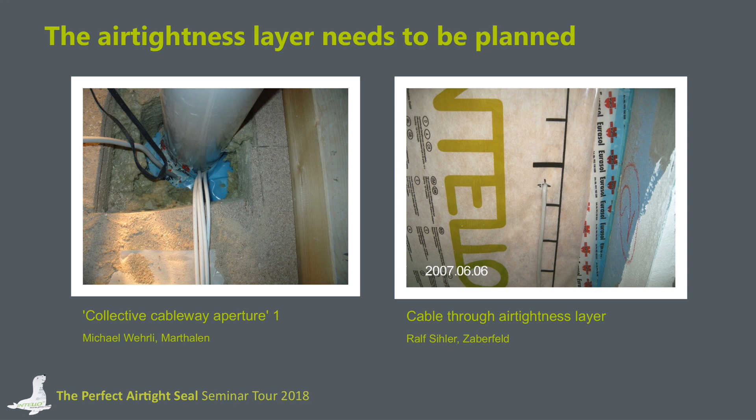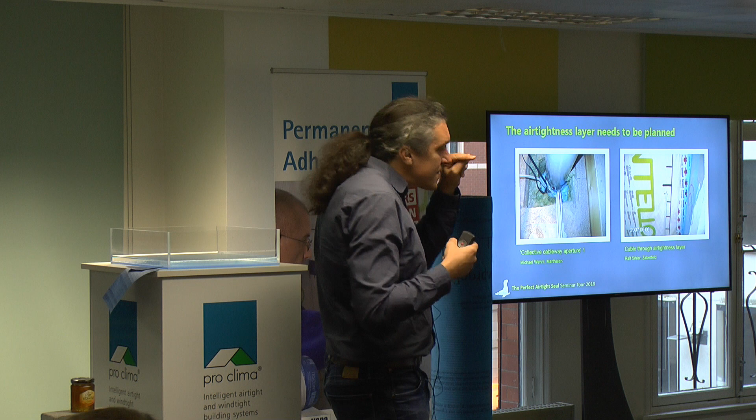I don't think that there will be a good solution for solving the problem on the left side, or at the right side. Obviously, the electrician knew a little bit about airtightness. And he said, okay, I just make a little hole into the membrane and then I push the cable through, but he has no tapes, no grommets available to seal it.

So if the installer of the airtightness layer will never come back, this will stay in this situation. The cable will penetrate the Intello membrane for the next decades. But this is not a sufficient solution for achieving airtightness. Or here, in the bathroom.

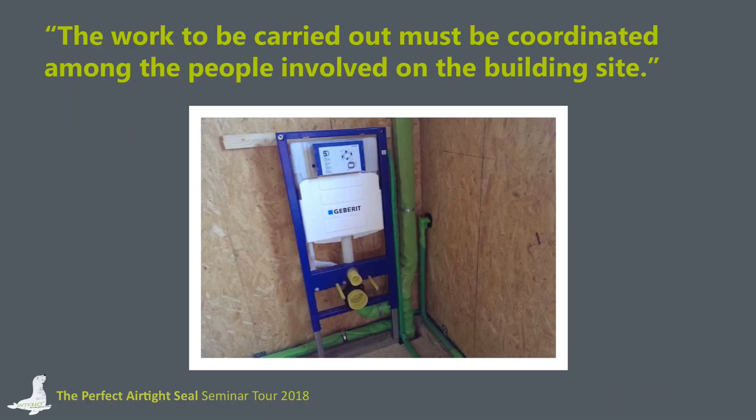So for the toilet, we can identify 2 penetrations of tubes that were not sealed properly to the OSB board. And in this situation, it could be possible that they will never be sealed, because in the next step, somebody is installing the gypsum board in front of everything. And then after the building is finished and the people are sitting on the loo, they are complaining about cold air affecting their kidneys.

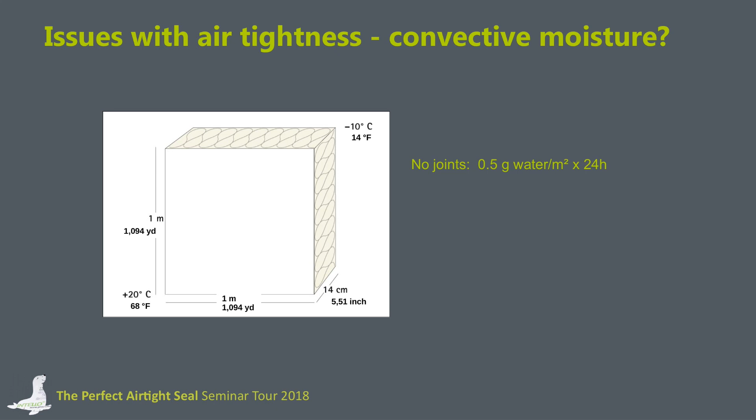This is happening a lot of times, and I guess that you have found it a lot of times when you're performing blower door tests. And you know where it comes from: unsealed pipe penetrations through airtightness layers. So this is why the people have to talk to each other. I already explained it, there's no second mark to be won in this situation, I'm sorry.

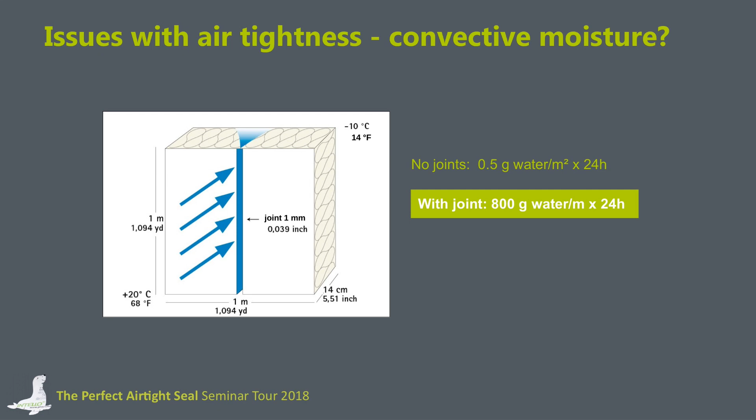800 grams per meter. Just remember how much moisture could get through leakages in airtightness membranes. There's another source for moisture, the storage of the material. I already explained it. Remember the roof hidden under the snow layer? This could happen to insulation material as well. You are not supposed to use insulation material that was getting wet due to the weather conditions and install it between the rafters, because then you get in trouble.

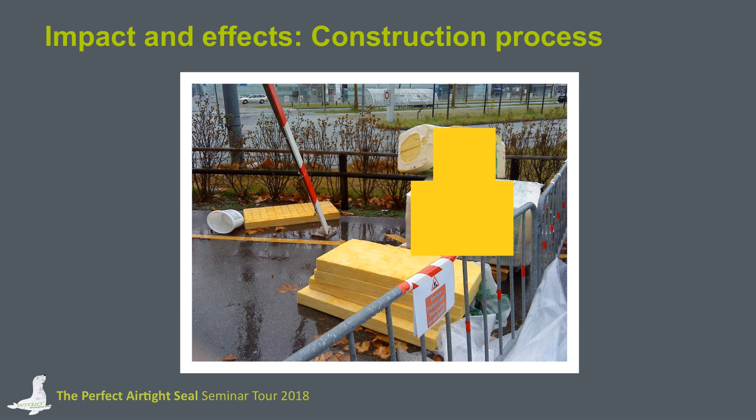Even if you install a humidity variable vapor check at the inside and have a diffusion open roof underlay at the outside, this needs to be dry before it could be installed. Or this situation, it's the same as with the timber. Some people think that the PE foil that is used to wrap the wood fiber insulation on pallets is enough weather protection and the material does not have to be covered.

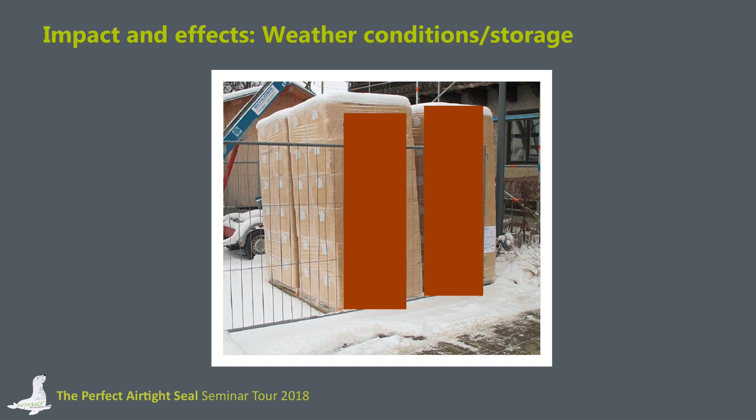But it's wrong. The PE foil used for this application is only to store the different packages on a pallet. It's not supposed to serve as a weather protection layer. So if you want to store insulation material outside, you have to cover it. Otherwise you could get in trouble, because the foil is not UV stabilized and it could get small holes and then the insulation material gets wet.

What are you doing in this situation as the installer of the insulation and the airtightness layer, or as the architect who is guiding the building site? You ought to be doing nothing. Nothing, of course. You wait until the plasterer comes and hides the moisture.

Of course. In Germany, the Association of the Carpenters published a brochure for carpenters producing furniture, and in this brochure it is mentioned that between furniture and walls of new houses there should be a distance of at least 5 centimeters, because they've experienced the problem that the furniture was growing mold on the backside due to moisture in the walls. This kind of moisture, you can hide it with plaster, but it needs to dry out.

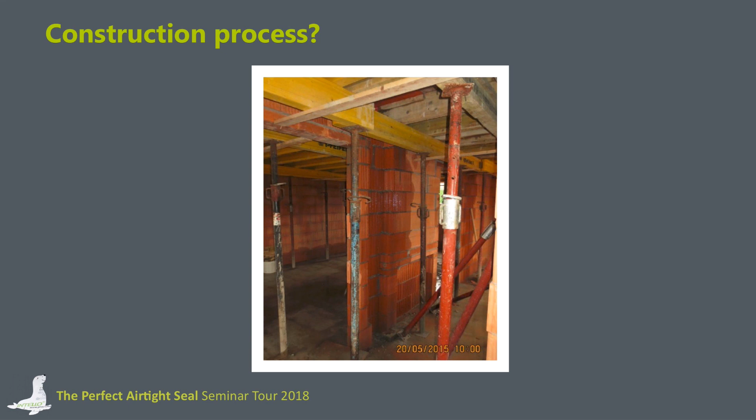So in this situation, you have to dry the walls. Probably you have to inform your customer and say, I'm sorry, if we are under pressure, we have to invest into mechanical drying facilities. We need to get rid of this moisture, otherwise we could get in trouble later on. And all this moisture is raising the relative humidity in your houses during the building time.

This is the moisture that we have to deal with during the construction time. Otherwise we could get in trouble and a problem could be caused within our constructions. And this is not a construction that has not been airtight. This is a construction where a lot of moisture was affecting the insulation material during the building time.

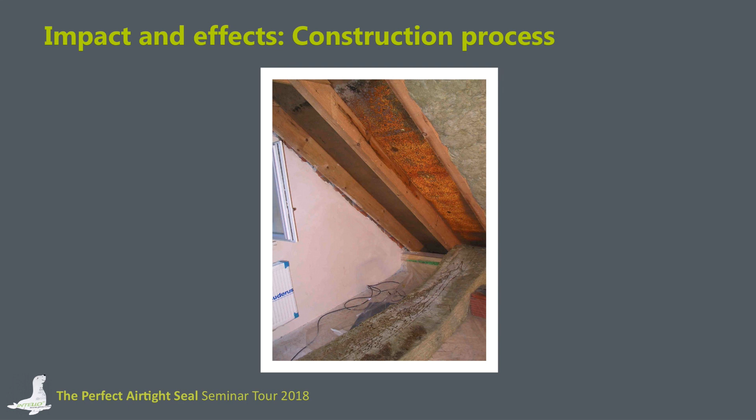And this was discovered by chance, not because moisture was running out of the construction. Somebody found it by chance because he wanted to install additional tubes that were forgotten in this building site. About 24% of building damages are caused by moisture. This is an examination that is published in a book, Learning from Building Damages in Timber Frame Constructing.

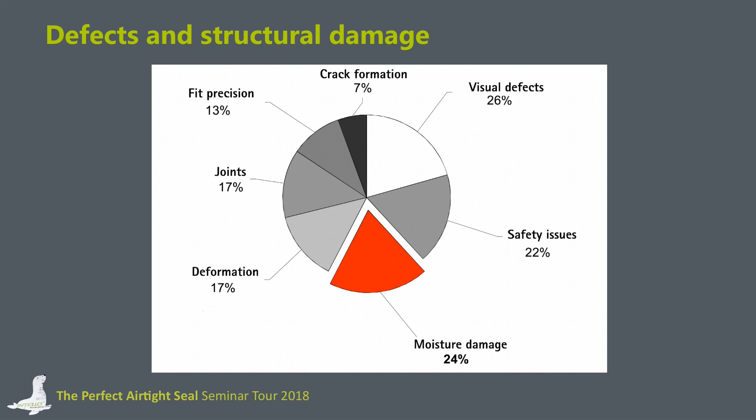It's a German book. And you can see visual defects, crack formation, joints, deformation, and most of the problems occur due to moisture in timber frame constructions. So that's where we have to spend the biggest effort to make sure that our constructions are not being affected. So we need dry building sites, we need low relative humidity levels, but the problem is that the timber frame construction of our masonry wall, of our brickwork house, is always the roof.

It's always there. And in brickwork, in houses made from bricks, you have always got a lot of moisture put in due to the screed, due to plastering. The material itself contains a lot of moisture. So if you install a humidity variable vapor check at the inside of your roof, then this vapor check has to resist the high moisture levels caused by building materials, the work that is undertaken at the building site, laying screed and so on. It has to offer a high diffusion resistance even if the relative humidity levels are rather high during the building time.

Because otherwise the material would let a lot of moisture into the construction and could cause problems there with growing mold, for instance. And this is where we have to take the Hydrosafe value into account, because we have got another German standard for wood preservation in Germany. And it says that a humidity variable vapor check needs to have an SD value of at least 1.5 meters at a relative humidity level of 70%. At least 1.5 meters, because if you've got a lower SD value, then the moisture that's occurring during the building time could get into the constructions very easily.

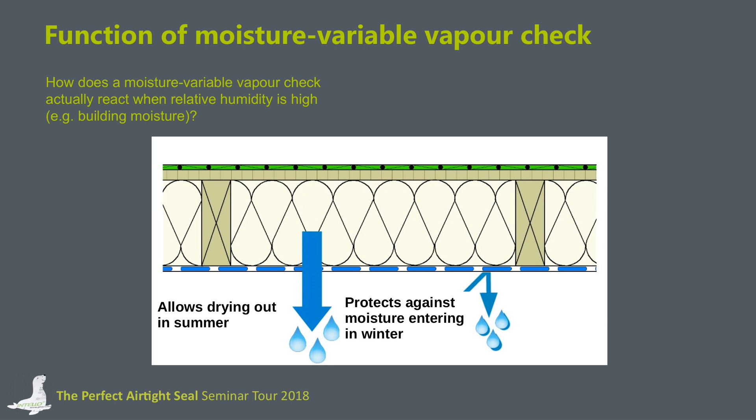And there are humidity variable vapor checks around, mostly made from PA, polyamide, that have got a very low diffusion resistance at 70%, less than 1 meter, less than half a meter. And they allow a lot of moisture to pass during the building time and to wet the insulation material as well as the construction. And this is a problem. So you have to be careful and check if humidity variable vapor checks fulfill the requirements of the Hydrosafe value. On the other hand, it shouldn't be higher than 2.5 meters. So it should be between 1.5 and 2.5 meters. Because if it's higher, you are getting less dry out capacity. Let's say at 70%, 100 meter SD value.

What SD values do you have to expect at 90% relative humidity? They wouldn't be low enough, because the lower the diffusion resistance is at very high relative humidity levels, the more moisture could dry out. That's why they limited the maximum SD value to 2.5 meters. So Hydrosafe means an SD value of the humidity variable vapor check between 1.5 and 2.5 meters at 70% relative humidity, and all the humidity variable vapor checks from Pro Clima fulfill these requirements. The DB Plus and the Intello Plus have got a fitting Hydrosafe value that secures that even during the building time, when the relative humidity levels are rather high, the constructions are safe.

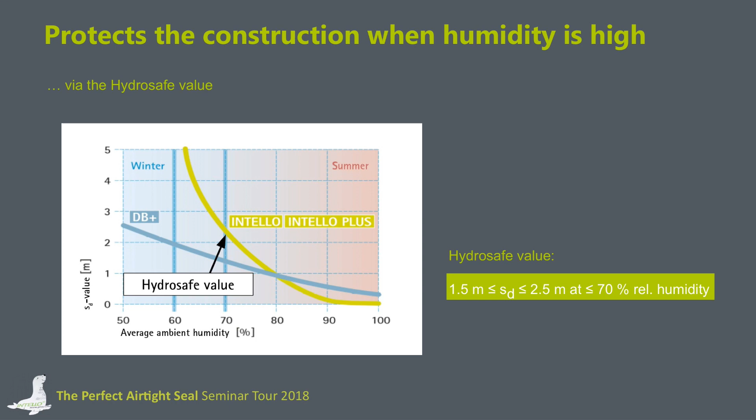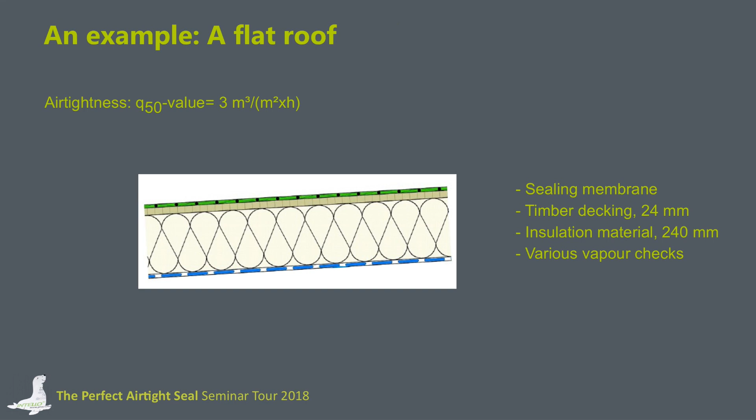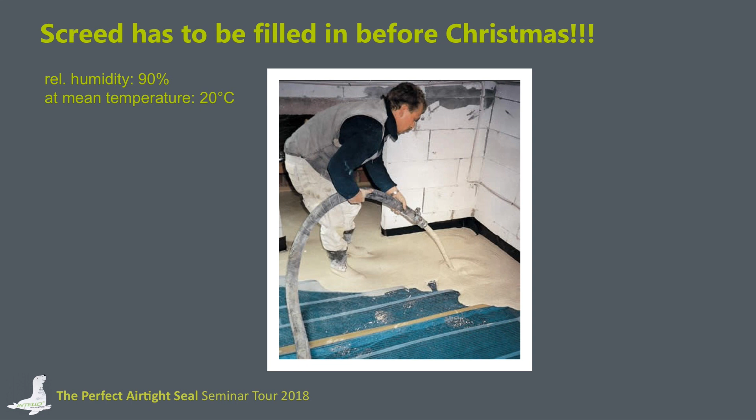So then we have got a relative humidity of 90%, could be possible. A rather high temperature due to the chemical process that is happening within the screed. And then we have to take into account the customer that says, let's install the screed right before Christmas, because then we've got 2 weeks off, nobody is working on the building site, and we can use these 2 weeks to fulfill the requirements of the screed laying people. Okay, so we installed screed on the 20th of December, and then they closed the building site. Windows shut, nobody was entering the building site anymore. And actually it was planned to start working at the building site again on the 1st of January the following year. What happened?

Nothing. The people who were planned to install the gypsum board were ill for 2 more weeks. So they kept the doors and the windows closed. And now we've had 4 weeks of 90% and temperature of 20 degrees. What's happening in our timber decking? Because this is the most affected layer when considering moisture contents of constructions.

We have performed a WUFI calculation for that, and we performed the calculations for an Intello membrane, for a vapor check with 2 meters, 5 meters and 10 meters SD value. And you can see during the 4 weeks, all different vapor checks lead to a rising moisture content of the timber decking. It doesn't matter if you use a constant vapor check or a humidity variable vapor check.

But you can also see that the more diffusion tight the vapor check, the less moisture is getting into the timber decking. So after 4 weeks we've got about 18% with SD value 5 and 10 meters, 20% with 2 meters SD value at the inside, and 21% with the Intello membrane. What do you think is the maximum moisture content that should be in the timber? 18 to 20. 20%, yes. And why 20%? Because it increases its risk of wood rot and insects.

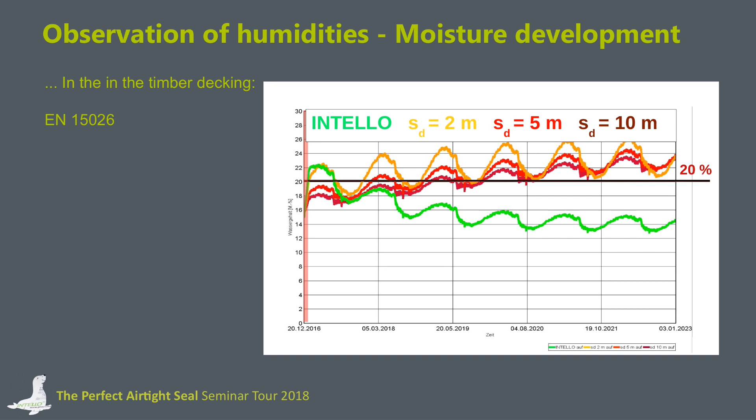It's not a problem if we exceed the 20% for a couple of days here, because this is only 4 weeks. And now I've extended it to a couple of years. And the 4 weeks is the thin red line at the beginning. So you can see that with the Intello membrane it increases to 22%. Then after a couple of months it dries out and gets balanced at about 15% moisture content in the timber decking, while the other membranes are still gathering moisture and they are not able to dry out this moisture content. They are gathering moisture for the construction, and this is the situation where the timber decking would start to rot.

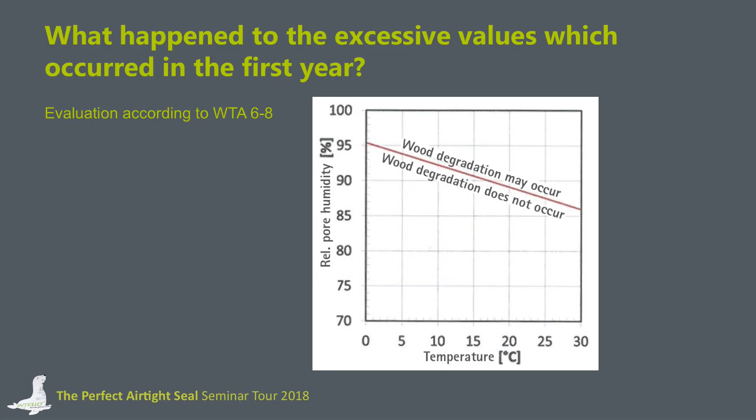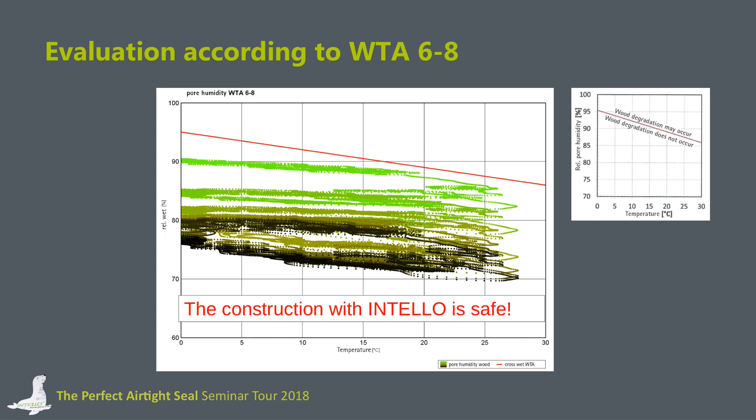And when we apply the results of our calculation to this method, then you can see if we stay below the red line, the construction is safe, even though we have got higher moisture contents in the timber layer, more than 20%. So this construction is safe because none of the calculated moisture contents of the timber decking has more moisture content than described with the red line. We are always staying below. So the construction is safe, even if we've got a couple of months with 20% water content in the timber and more. That's why it's very important to have a membrane with a suitable Hydrosafe value.

Of course, you're not supposed to store timber frame constructions under humid conditions for years or months. You have to make sure that the relative humidity levels do not exceed 60%, 65% for a long period of time. But if you've got rather small time periods with high relative humidity levels, it's not a problem for the construction if you've got a membrane with the right Hydrosafe value between 1.5 and 2.5 meters at a relative humidity of 70%.